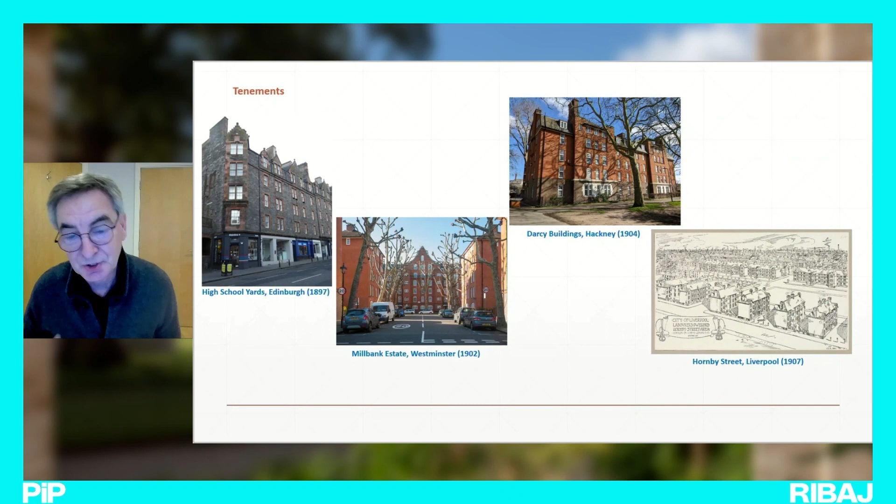So tenements were a means, it was felt, of providing dense habitation within the inner city, close to work, etc. But the ideal was certainly the cottage and the garden suburb, taking its cue, as you'll all know, from Ebenezer Howard and the Garden City movement, but expressed on a sort of smaller municipal scale in schemes across the country.

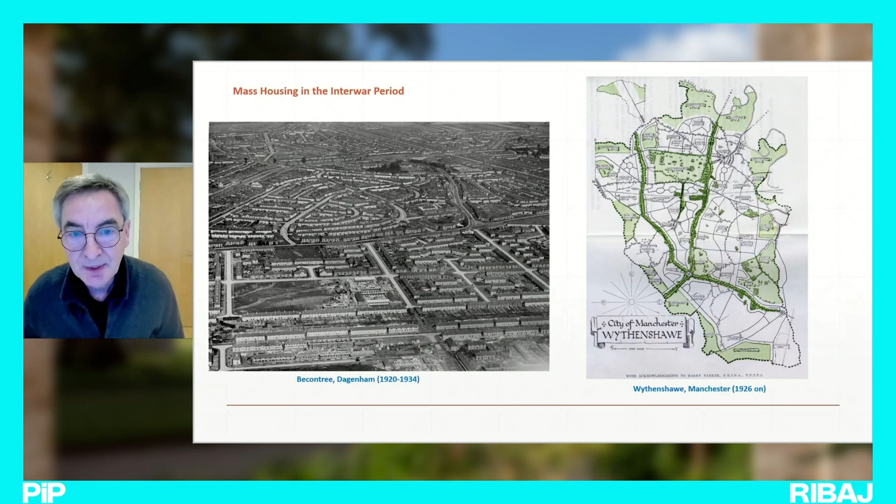Becontree, of course, was criticised for that scale and enormity, alleged uniformity. City of Manchester Wythenshawe, Barry Parker, the plan there you can see, was I guess a higher grade social housing estate, built with parkways and plentiful green spaces, neighbourhood units and so on. So it represented really almost a township in terms of its quality and overall design.

So architects and architectural gurus always look to the British history of council housing and tend to be somewhat disappointed, certainly in the interwar period, by its rather small-c conservative style and appearance. So there were some examples of modernism. Sometimes the form, the exterior, betrayed the reality, which is still this 5-storey walk-up balcony access.

But certainly on the left-hand side, the Oaklands estate, London County Council, as was the White City estate there - you know, this nod to the ocean liners of the day in this modern styling. White City estate was actually a move away, the new flat. You can see, probably not in sufficient detail, but the new flat staircase access in this case, with a sliding partition between the kitchen and dining room. And so a real attempt to modernise tenement living and make it more attractive.

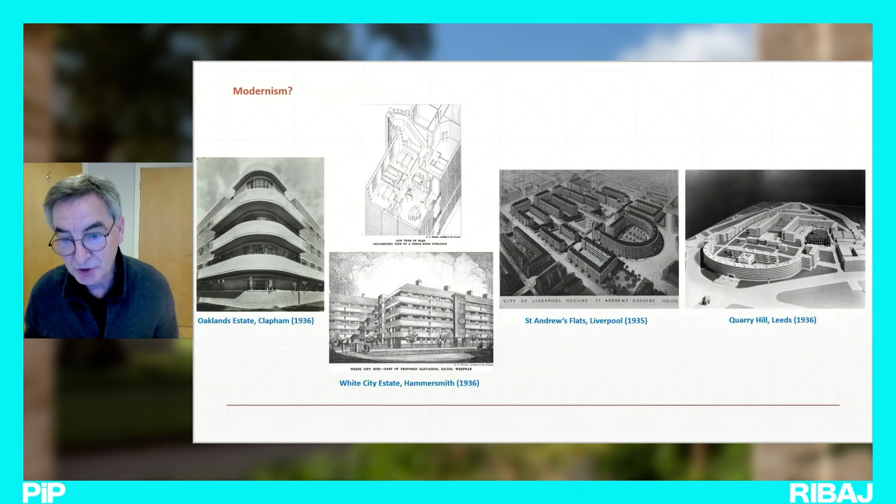St Andrews flats in Liverpool, Lancelot Keay, and Quarry Hill flats in Leeds were obviously, as you can see, an attempt to build at scale, but an attempt to build really a community - so not just those flats as illustrated, but a living community in terms of facilities, a wide range of facilities. Quarry Hill was also very innovative in its use of prefabrication, not unfortunately successfully so. It was eventually demolished in the 1970s.

So this takes us up to the Second World War. And of course, that same drive, that same post-war aspiration, and indeed necessity, given popular pressure and politics, to build well and to build at scale, to house the British people far better than they had known previously. And you know, what emerges in '45 is actually, in some respects, very much a critique of what had developed before the Second World War.

Becontree, for example, was criticised for its lack of community. Other similar estates were seen as rather soulless and uniform. So there were several attempts to actually improve the nature and form of council housing, the council estate. Most notably, and this was Patrick Abercrombie's big idea, really the foremost planner of the era, the neighbourhood unit.

And the exemplar of that, the avatar, was the Lansbury neighbourhood, built for the 1951 Festival of Britain, and designed, as you can see on that left-hand image, to be a complete neighbourhood - a self-sufficient neighbourhood centred on the catchment area of an elementary school, schools, churches, shops, pubs, etc. And it was believed that this would actually foster community and in some respects recreate what was allegedly being lost to the demolition of the slum terraces.

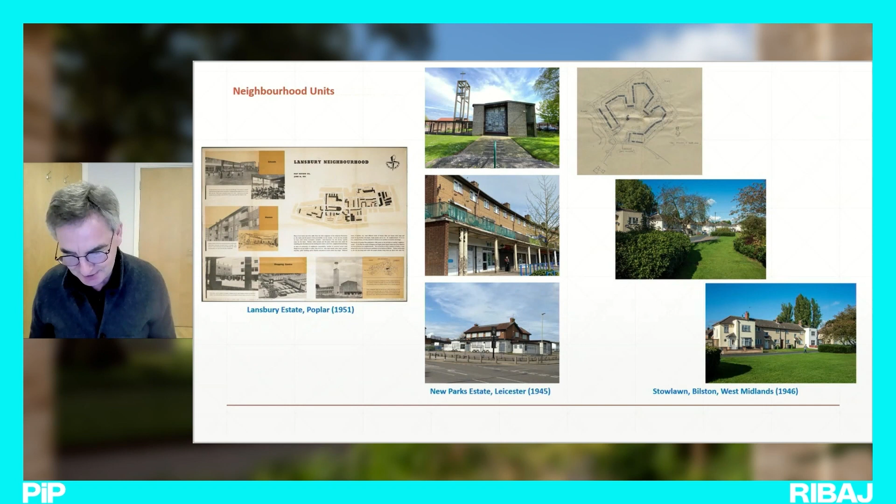So looking again, the other big idea to both improve the appearance of council housing and its offer, as it were, was the notion of mixed development. Not a stunningly innovative or surprising idea, but the reality is that in the interwar period, nearly all council housing had been family housing, 2-3 bedroom family homes. And by 1945 and on, there was a realization that a wider range of the population - elderly people, elderly couples, single people and childless couples - also needed council homes.

Mixed development was an attempt to provide a range of housing to people in different stages of life, but it was also envisaged and embraced by architects as a means of providing a far more interesting and greater variety of housing forms and shapes.

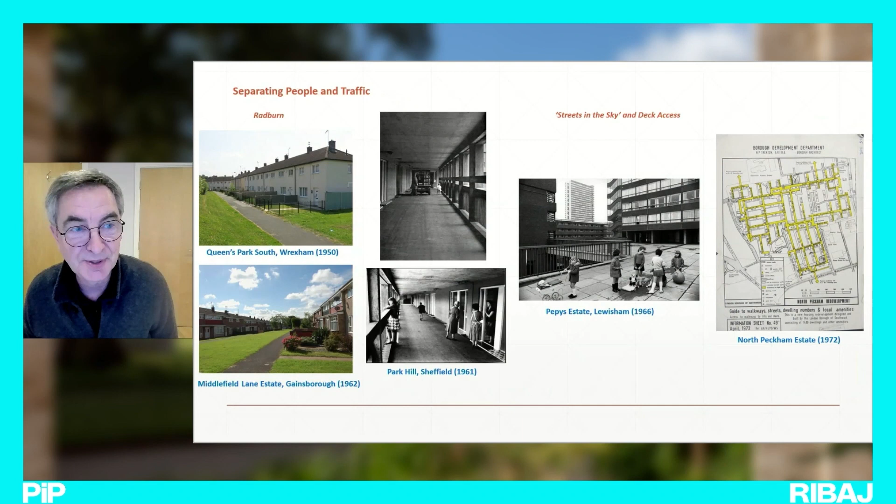Multi-story, of course, becomes a necessity - both to avoid the sort of sprawl into rural areas, and to provide density, allegedly density, within the inner city.

But again, the ambition and drive to build at scale sees that corrupted in some sense. System building poorly executed in a British context is one issue, and then just the drive to build high - although actually only in 1968 were 25% of new approvals high-rise over 6 stories. In fact, between '45 and '79, 70% of council housing was 2-story.

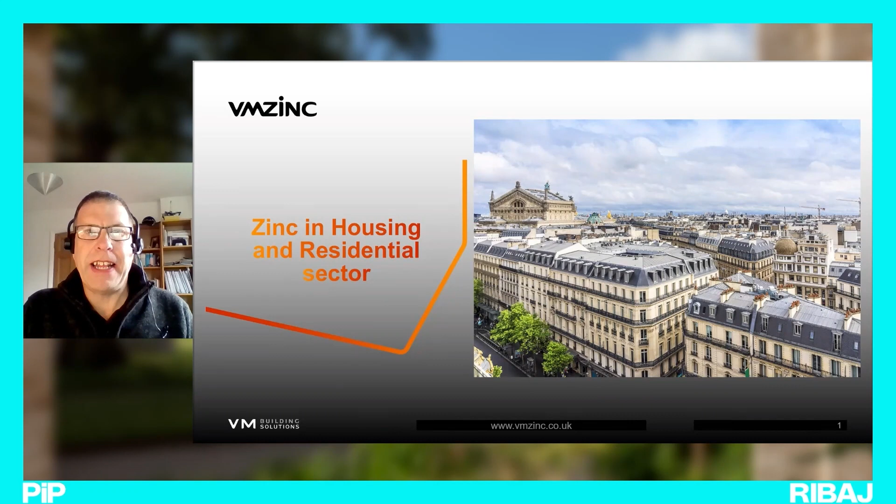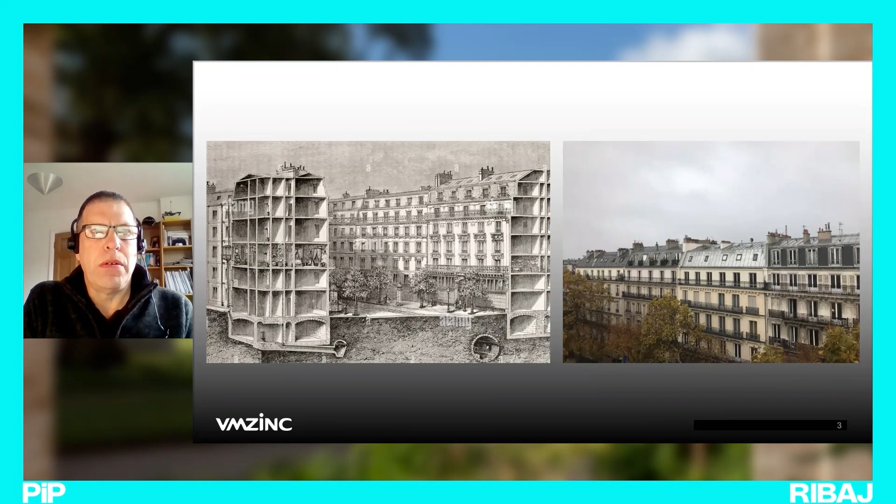Baron Haussmann built, or planned, these grand boulevards, which are pretty much still completely intact today. As mentioned previously, there was a bit of mixed use in a lot of these buildings. The bottom two floors, ground and first, were business areas, the second, third and fourth floors were the noble quarters, and the top floors were the servants' quarters. Obviously there aren't too many buildings with servants' quarters left, but the top floors are often residential and clad in zinc.

There's sometimes a combination of zinc and slate, or just zinc, but 95% of these buildings have zinc on them. Something I get asked about quite often is the acoustics of zinc, especially if it's directly above a bedroom - and nearly all these roofs are above bedrooms. Zinc is relatively soft, not as soft as lead, but much softer than steel and aluminium. Because it's fully supported, the amount of sound from impact noise like rain or hail is actually very, very small indeed, so generally not really a problem.

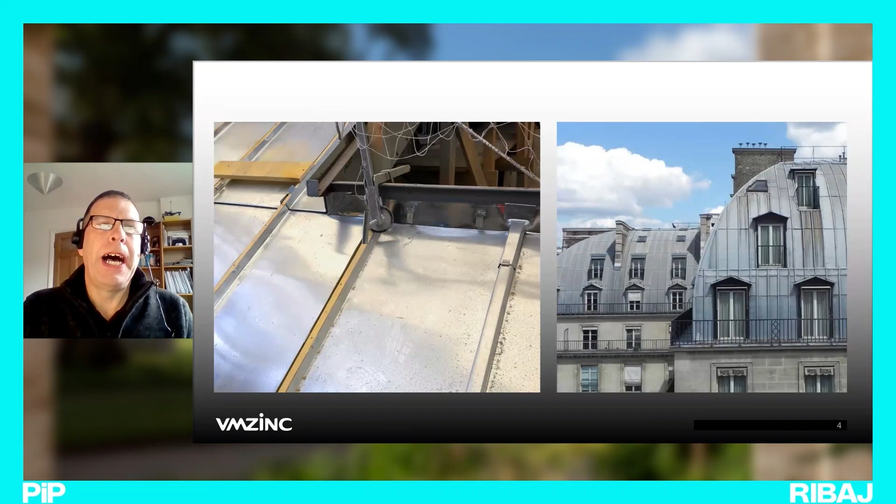Just to show you close up - I've had conversations recently with people thinking zinc is just standing seam. Traditionally it's batten cap, not dissimilar to a lead roll. On the left you can see a U panel with a piece of timber and then a cap over the top - that's the traditional way of doing zinc roofing.

Sometimes it's used to replace lead roofs. Zinc and lead actually have a lot of similar characteristics, but one of the big differences is density and weight. A zinc roof weighs about 7 kilos per square meter, whereas a lead roof is close to 25 or more - that's unfortunately one reason why lead gets stolen, since you don't need to steal much to make it worthwhile. But stealing zinc, you'd have to steal an awful lot, so in reality that never actually happens.

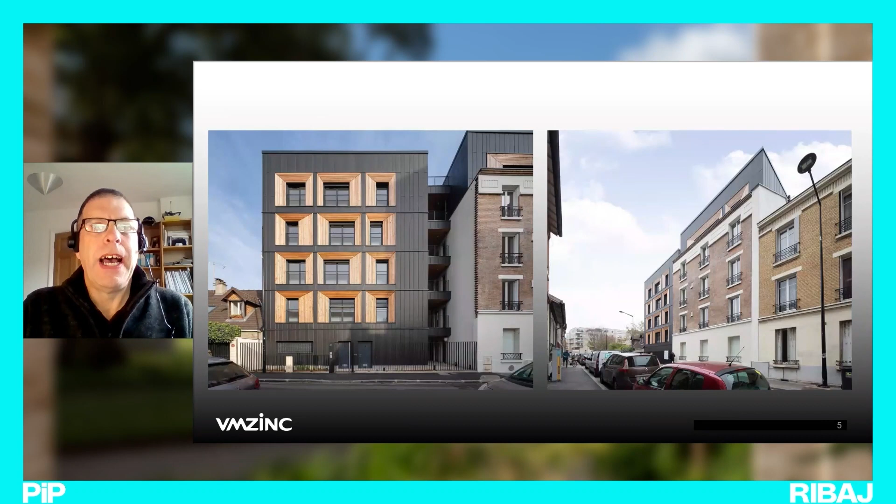As the previous speaker John mentioned, especially around Paris or other French cities, there have been housing estates that haven't been the most successful socially. This photo is in Aubervilliers, a fairly working-class northern suburb of Paris - a 1920s building that's been redeveloped, extended upwards and sideways, with about 15 affordable units added, clad in a combination of anthracite, which is dark zinc, and timber by Pietri Architects. There's been a desire to reduce building heights, going from very tall 20-25+ storey buildings to lower rise, still quite high density but lower rise.

Moving to the UK, this is a development in Manchester called Lampwick Quay by Callison RTKL Architects, finished about a year ago. Larger scale this time, with 213 units.

And it uses, from the zinc perspective, a combination of systems and finishes. Zinc is generally grey, but there was a desire by the architects to highlight some areas, and a gold zinc was used. One advantage of zinc over other materials is it's very malleable and flexible, so you can clad tricky flashings and details with zinc when other stiffer materials are trickier. Here you see a combination of the pre-weathered quartz zinc and the coloured gold zinc using standing seam and rain screen systems.

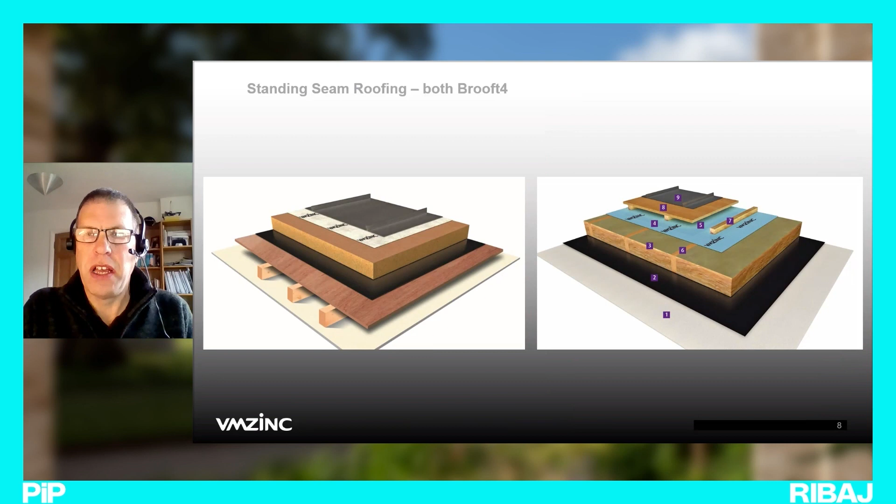As you saw on the previous slide, we talked about timber. For walls, for example, the project in Manchester Lampwick Quay required non-combustible substrates, residential building over 18 meters. It's quite straightforward to replace the plywood or timber substrate with a galvanized steel deck. The zinc itself is A1 - it can become A2 with some coatings, but that's still quite acceptable, as it's non-combustible or of limited combustibility. So it's fairly straightforward to create an A1 or A2 wall build-up with zinc.

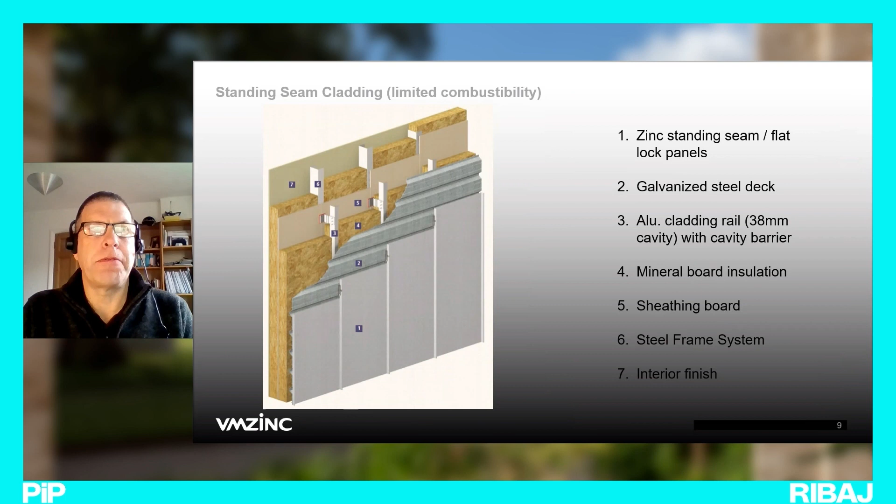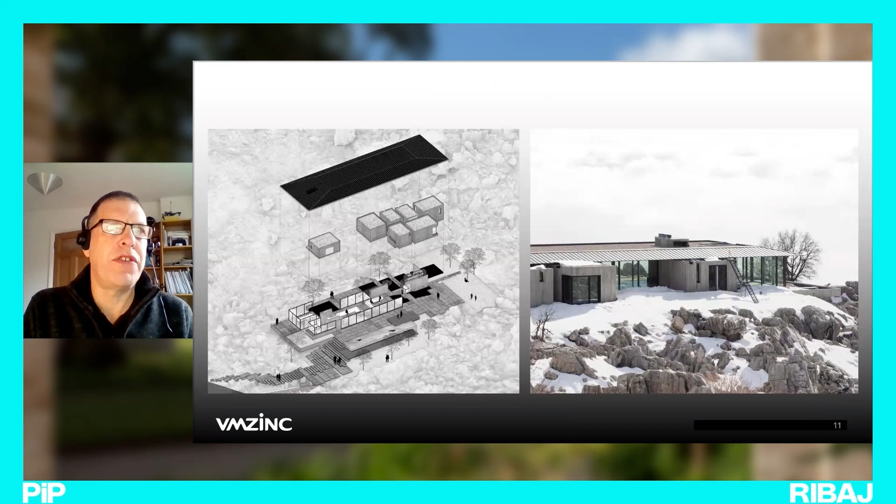Moving out of Europe, this is I feel quite a spectacular project - a building or house in Mount Lebanon called On the Rocks. I think you can probably see why. It's at 1,600 meters altitude, and the whole design really fits well with the environment - the anthracite roof, the concrete, and the glazing. On this slide on the left, you can see, it's obviously a blown up image, but the idea is that the zinc roof sort of floats above the building quite effectively. This is a project by Karim Nader Design. It's nice to see quite an interesting building in such an unfortunately war-torn part of the world.

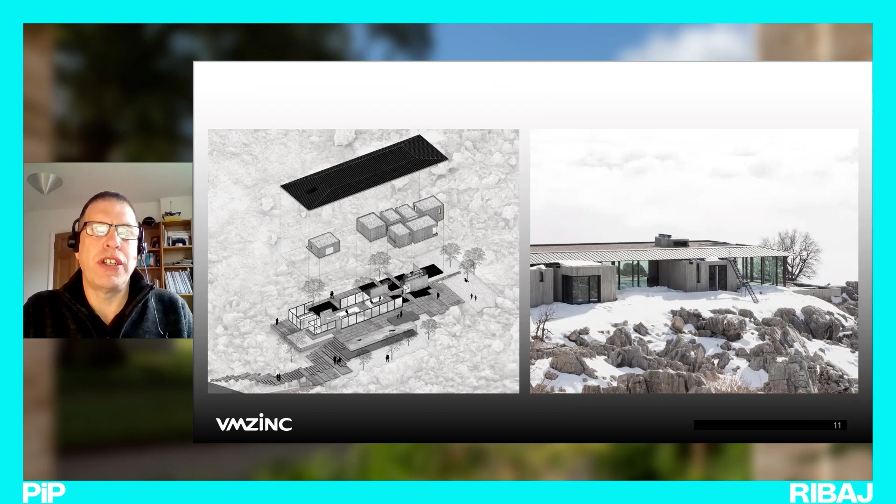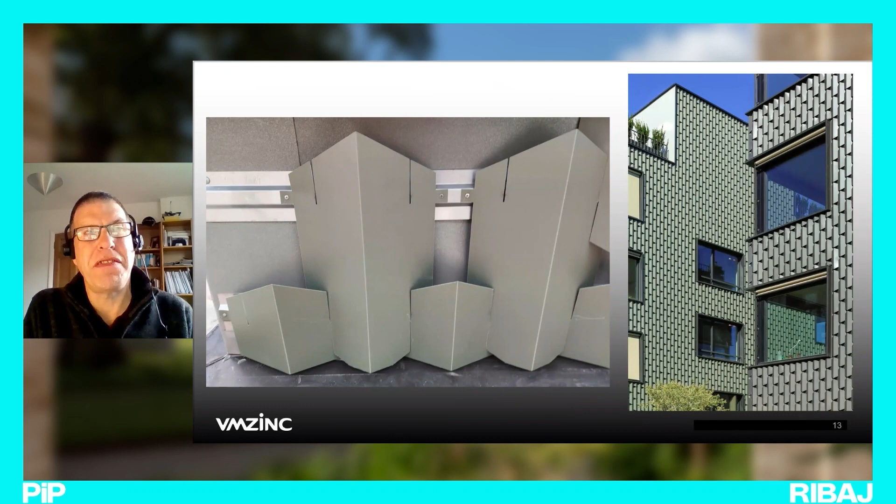Back into Europe, this is a residential building in Zurich, Switzerland, in an area with a very eclectic group of buildings, so this one fitted in quite well. It uses Pigmento Green and Pigmento Grey, which is zinc with a mineral pigment added, giving a slight greenness, as you can see on the facade of this building - it's a bit like looking at zinc through tinted glasses. Here you can see how the panels fit together - it's actually very simple rain screen panels, installed bottom to top. This design was by Menzi Bergler Kaufmann Architects, and they used 14,000 of these little shingle pieces to create this textured facade.

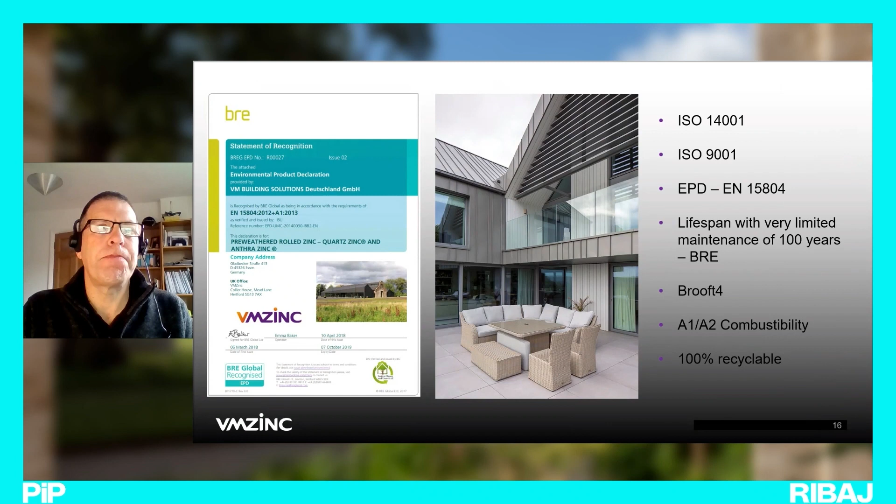If you do need any assistance in design, we'd be happy to look at that. One important thing is installation. Zinc is a great material, but it does require good installation, certainly if you want it to last any amount of time and still look good.

We have a list of recognised installers, and we have a program of VMZinc at Work partners that can offer a 50-year material warranty. So that is something that's very important. We would always recommend that a recognised installer fits zinc. Zinc is not something that can be installed by a general builder.

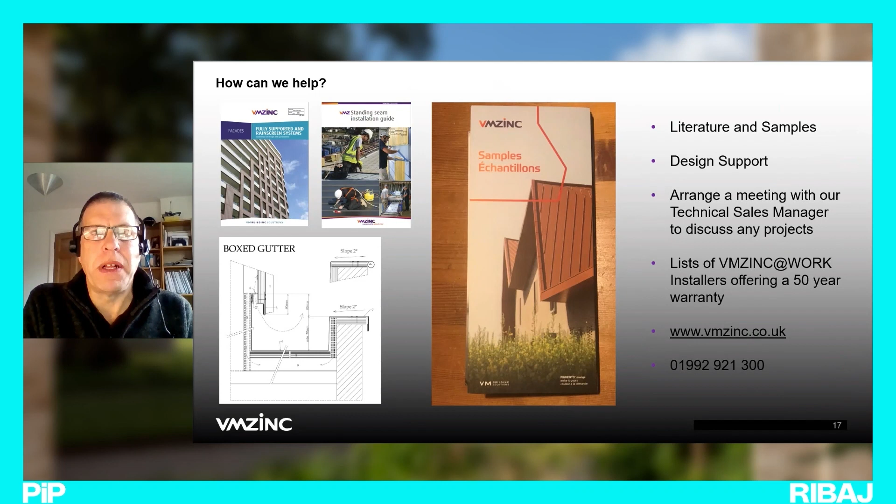You kind of skirted from 170 years ago all the way to the modern day, Jonathan. I cheated a little bit, yes.

Thank you very much indeed for that. It was nice to see those examples. I particularly liked seeing that Lebanese project, really beautifully done. Just the very fact that you could look at that building immediately and realize that the roof is doing that expressly, that purpose. Everything else moves underneath it and the roof just floats above. Really beautiful project. I've not seen that one.

I suppose my technical question, because you did go into some technical aspects there which were interesting - just as a general rule, could you tell me what affects the fire rating of the zinc sheet? It seems to be that the general thing is if you give it a colour coating, that may affect it. Is that correct, or is it that simple? It pretty much is that simple.

Zinc itself is a metal and is non-combustible, and all this is solid pure zinc. A lot of those products that you saw are natural zinc, or quartz zinc, or anthra zinc, and that is just zinc which has nothing added. Some of them are chemically treated, but then nothing's added.

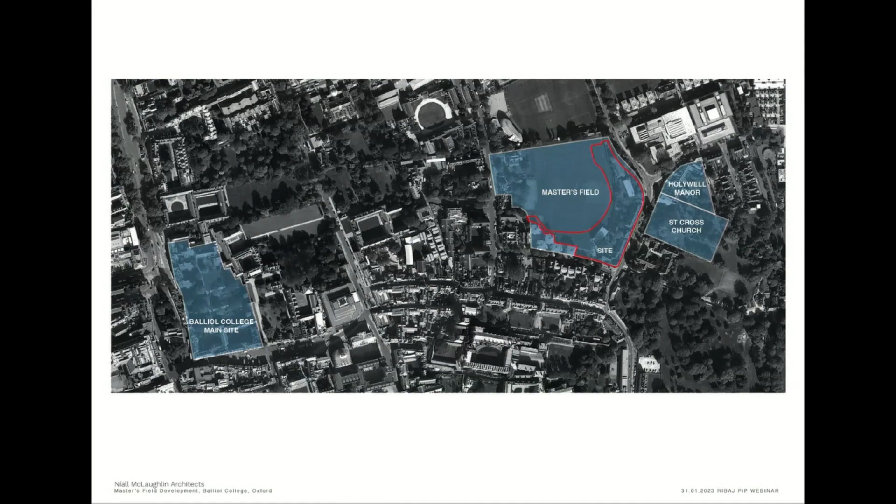The site is interesting because it's proximate to the civic core of Oxford, and also to the larger University Parks developments, which occupy the north, and a lot of the parkland setting to the east of the site. As an office, we're really fortunate to have worked in Oxford for a number of years, and the Master's Field Development joins a series of these projects.

One of the earliest to be completed was some student residences for Somerville College as part of the Radcliffe Observatory Master Plan. We also delivered the Sultan Nazrin Shah Centre for Worcester College, another project that occupies the edge of a cricket pitch, similar to the Master's Field Development, which is just here at the bottom of the sheet.

We've got a few projects currently at tender and planning stage in North Oxford, one for University College, identified by the 7. That should be starting on site in the next few months. And we've just submitted for planning a hybrid scheme for a college and Oxford University along Winchester Road, which is here where my cursor is.

This map is useful because it highlights the site's geographical position, hugging this edge of the civic core, and then the expansive landscape to the east. To the north you can see the larger scale of institutional buildings, and to the east, those of you familiar with Oxford will recognise Arne Jacobsen's St Catherine's College building here.

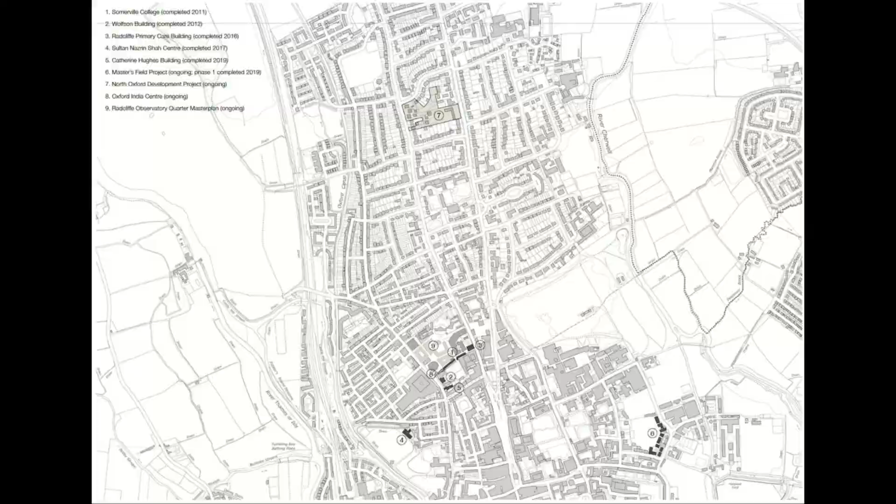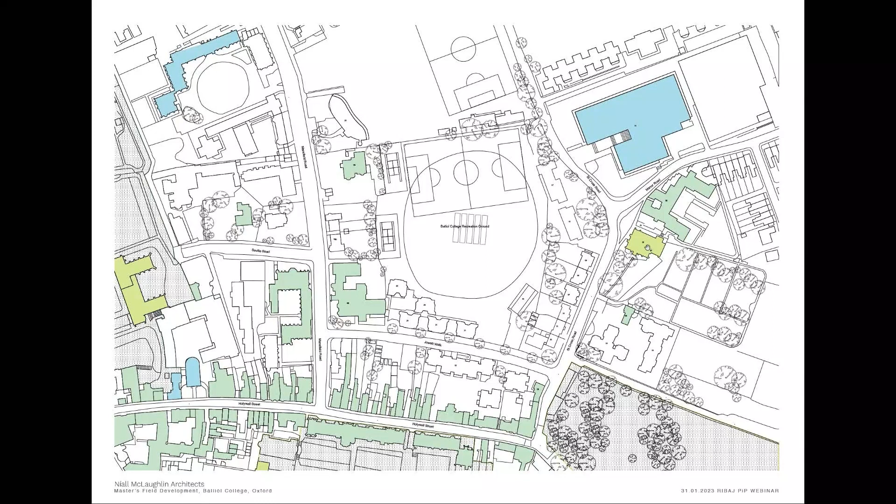When we were introduced to the site, we were mindful of its historic setting. There's a series of listed buildings proximate to the site itself, and then Holywell Street, one of the oldest streets in Oxford. We've got the Grade 2 star listed Law Library by Sir Leslie Martin in the northeast corner of the site, Holywell Manor, which is Grade 2 listed and houses the graduate facilities, and then St Cross Church, a Grade 1 listed building currently hosting the college's archive centre.

The project was always going to need to reconcile a series of very different and disparate architectural conditions around the edge of the site. I've introduced you to the buildings on the right already - we've got the stone, the buff coloured stonework of the church, and a similar buff brickwork that was used by Leslie Martin in the Law Library.

And then there's a scheme developed in the late 90s, early 2000s by MacCormac Jamieson Prichard, which has a very strong yellow brick, and that sits in close proximity to the site along the south.

Another interesting condition of the project when we were introduced to it from the college was a series of unrealised master plans that had been proposed for the site over the years. Starting at the north was the master plan by Leslie Martin for multiple buildings at the northern part of the site.

What was interesting here is that the buildings to the north cascade along the arc of the road towards the church, stepping back and forth with the library. There was obviously some kind of dialogue that the architect was trying to set up there with the library development and then the future propositions to the north.

Similar to the south, the scheme by MJP was envisaged as a much larger development. They continued the rhythm of buildings and promontories that would follow the arc of the cricket pitch.

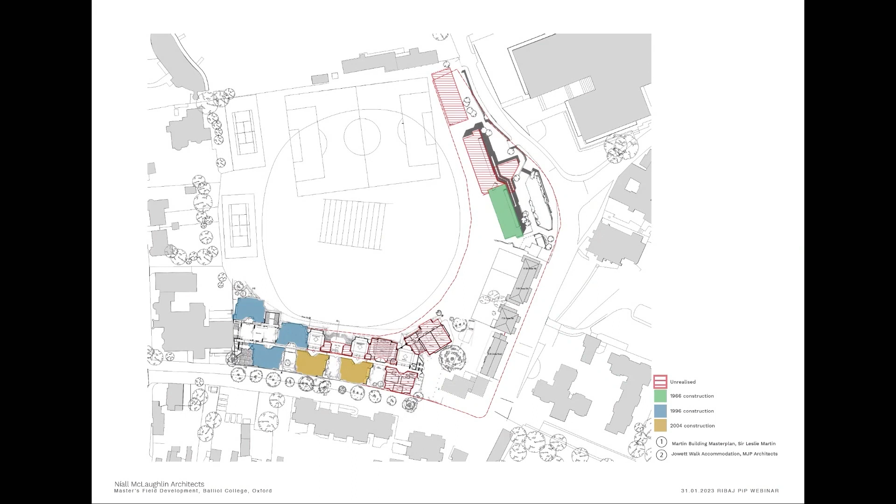So when we were asked to develop a series of student rooms for the college, we were mindful of the layers of history on the site and how we could make nods and take cues from those. Particularly the buildings at the north - they're larger in footprint, and we slip and slide them backwards and forwards towards St Cross Road in dialogue with the library.

Where the library pushes into the site, we recede a building. Where the library building recedes, we nudge the buildings forwards, and we mimic this cascading of building gables towards the corner of Manor Road.

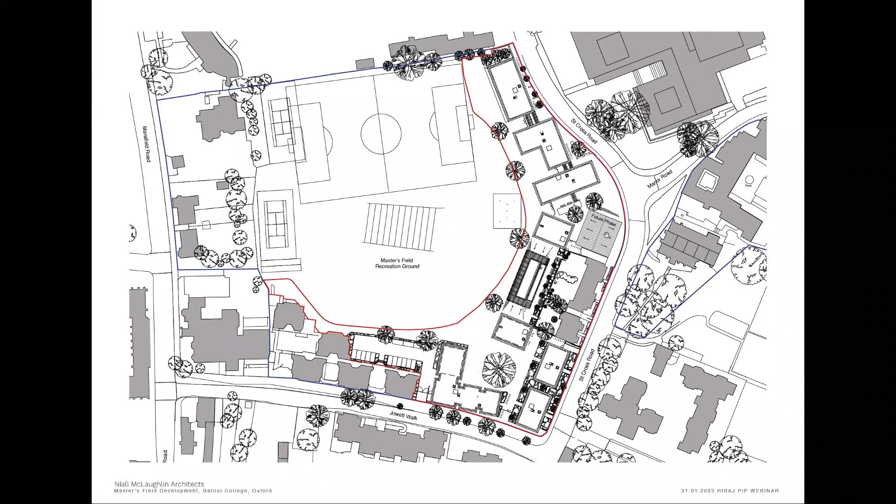We were interested in looking at the gaps between buildings. The scheme provides 225 study bedrooms, a 3-bedroom professorial flat occupying the top floor of this building to the south, a new sports pavilion anchoring the centre of the plan, and planning permission for an assembly building at this corner, providing facilities for graduates as part of an extension of Holywell Manor.

This is very much a project about buildings that form the edges of streets, and is sensitive to the material scale of the historic context. Most of the buildings are 3 stories. Where they're in proximity to residential buildings, we step the buildings back from the street and introduce garden frontages to act as defensible space for the residences, mimicking the garden-lined frontage south of St. Cross Road.

To the north, where buildings sit closer to the street edge, we elevate the bedrooms. This acts as an acoustic buffer from street noise, and we've also used enhanced acoustic glazing and trickle ventilation in the windows. Here you can see this series of cascading gables as you move southwards along St. Cross Road, which also frames the gable of the church.

Another key aspect of the scheme was looking at the scale and massing of the buildings and how we could introduce gaps between them. Historically, college developments are fairly introverted, often set behind high walls, offering limited public interaction with this private inner world beyond.

With this scheme, we wanted to flip that narrative and maximise the site's proximity to the parkland settings to the east, and also pay homage to the rhythm of buildings and gaps between buildings that the MJP scheme had set up in the late 90s.

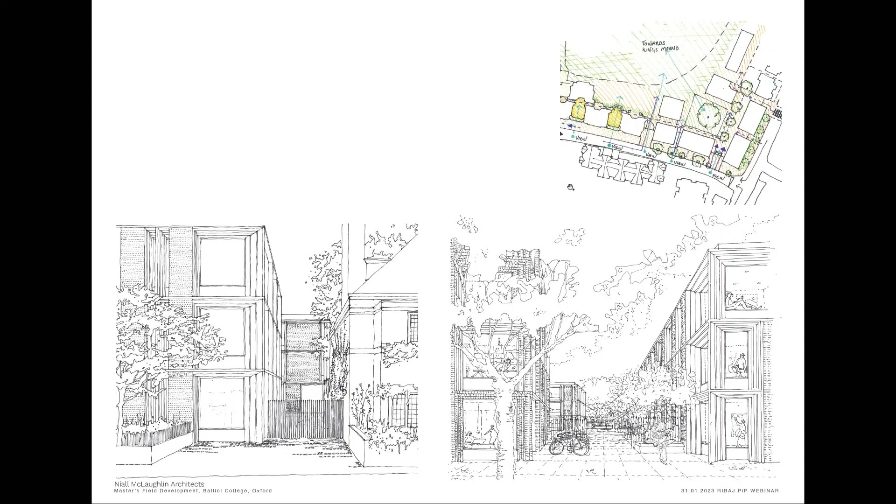Each of the buildings' footprints are relatively small, which allows us to break up the massing with a series of gaps between buildings that offer long views through the site, both to the gardens we've created and towards the cricket pitch. You'll have seen this image at the start of the presentation, one of those gaps looking across the new undergraduate southern quadrangle, framing a significant veteran beech tree and a view towards the cricket pitch beyond.

At each of the gaps between the buildings, we also looked to plant trees around the arc of the cricket pitch, which is also a nod to the village green for Sunday cricket playing.

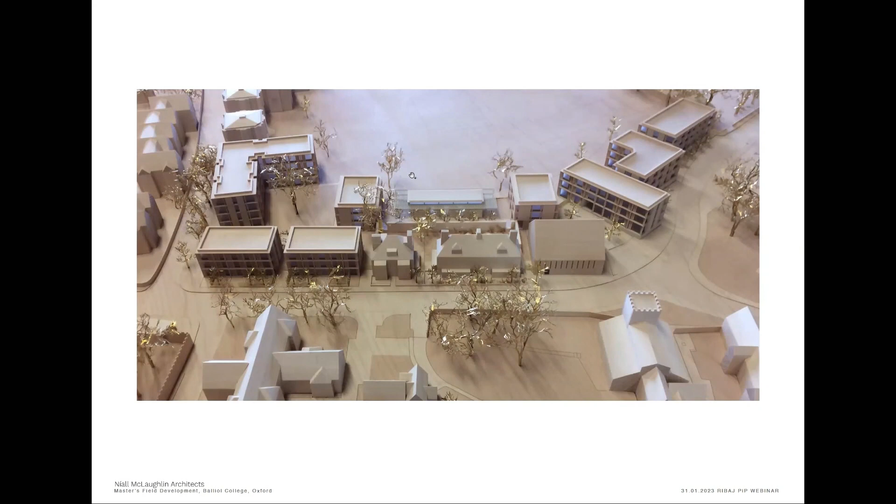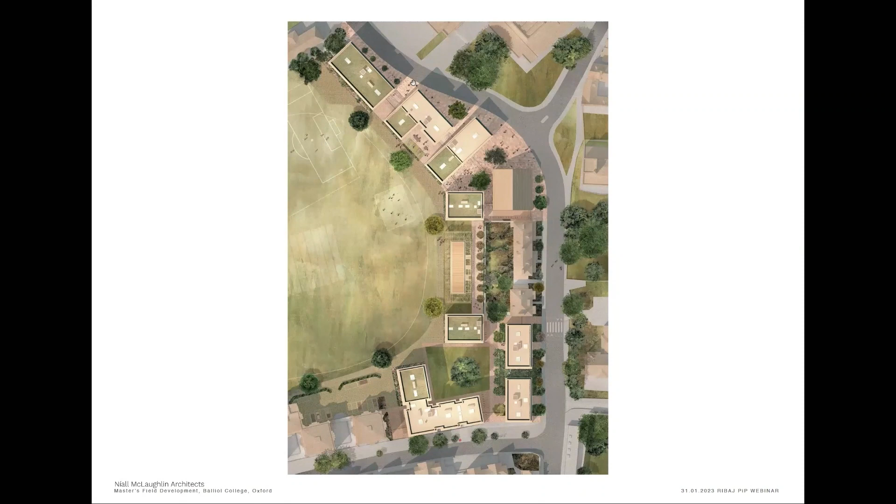Collectively, these buildings are grouped as clusters around the new landscapes we've created. Buildings are close to the street edge to the south, recede along the eastern edge with those gardens we saw earlier, and then step backwards and forwards in dialogue with the larger scale of buildings towards the north.

In terms of the plan and the brief, the college asked us to consider an architecture that could reduce social isolation. When we thought about the life of students, we imagined this social gathering and interaction at the heart of student daily life.

We placed the idea of students around a dining table and looked to cluster rooms around this social gathering space. We then took that notion of spatial arrangement within each cluster and arranged buildings radially around communal gathering spaces, in this instance an external quadrangle.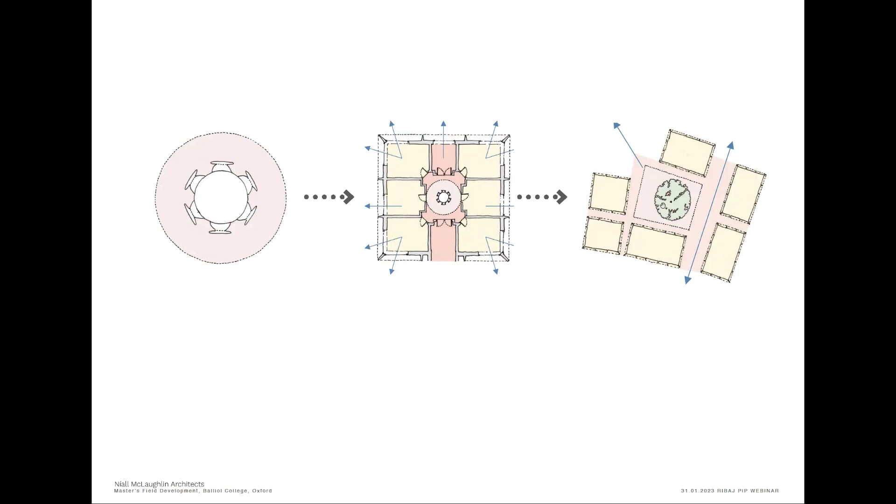At the centre of each of the clusters, we widened the corridors. This allowed us to create dining and social spaces. It also allows us to recess the entrances into each private study bedroom within a niche, offering a private threshold between the corridor space and the bedroom itself.

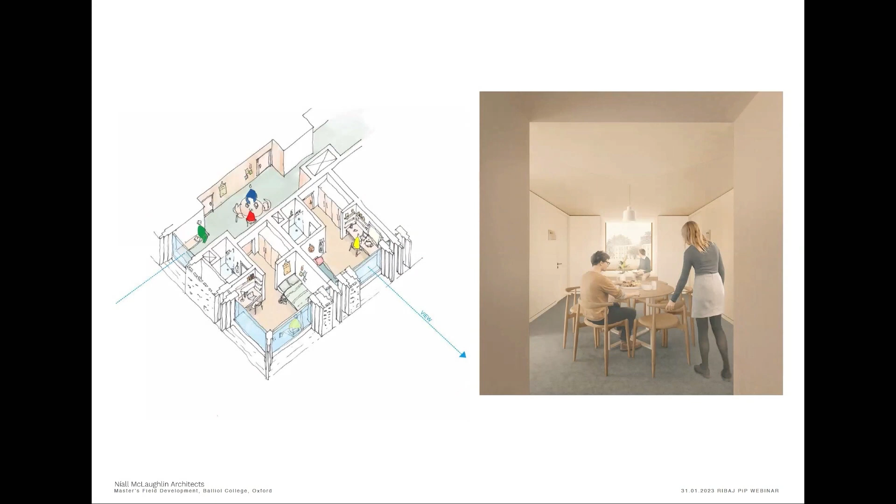Each of these clusters comprises a glazed link at the end of the corridors, offering views out across the landscape and flooding these shared spaces with light. We painted each cluster in calming colours and elevated the ceilings to announce this central social space.

We then scaled that up as a spatial arrangement across a series of buildings to create a necklace of clusters, all linked through the glazed gable ends, building to building. It also allowed us to keep the building footprints fairly modest and maximise the quantity of dual aspect bedrooms at the corners.

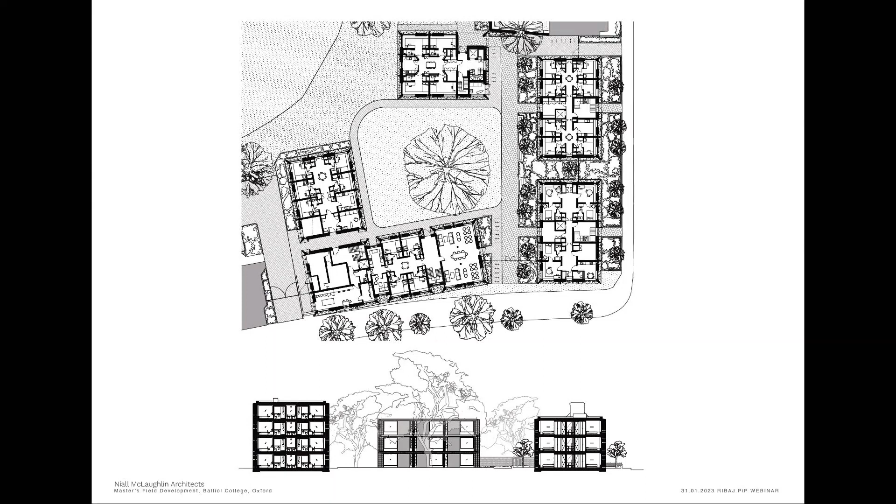Each of the rooms are fairly simple in terms of their fit out. They're all individual study bedrooms with an ensuite bathroom pod typically, and a range of furniture that can support both the sleeping function of the room and study. Each bedroom also comprises a window bench for resting.

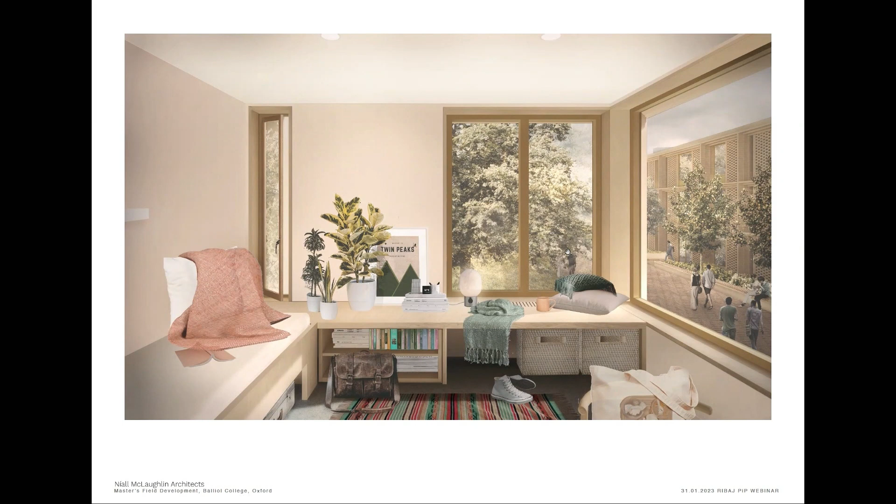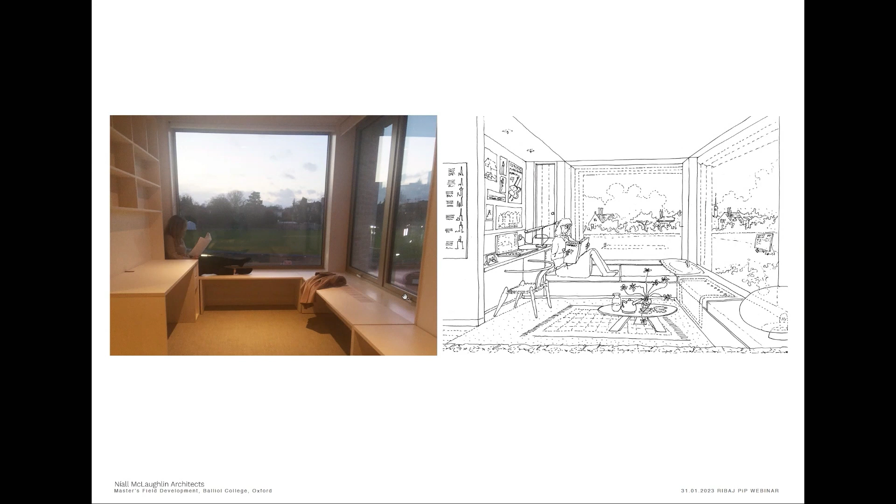Externally, each of the study rooms is represented within a brick face precast bay. The bedroom itself is recessed back within the depth of the piers, and then there's also a woven motif panel that sits between the two windows. All windows are openable on these elevations for natural ventilation into the bedrooms. This woven motif acts as a dividing panel between the bed and the study area.

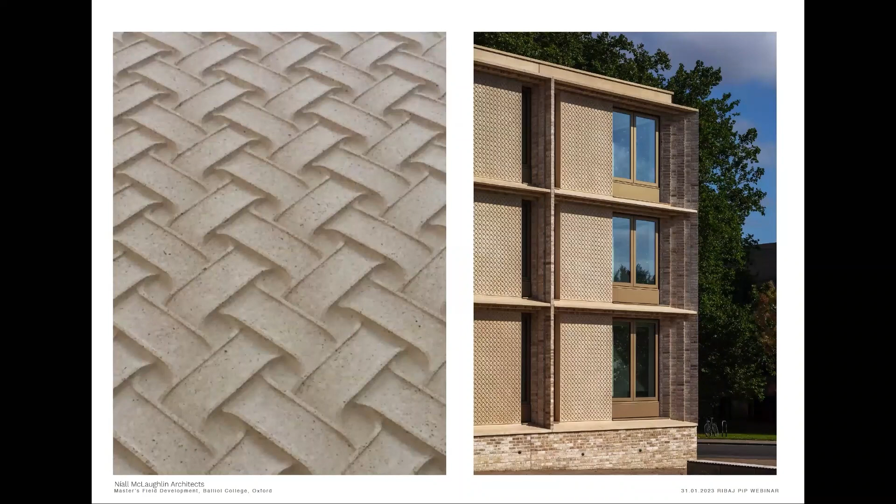The panels themselves support the gravity loads and the downward movement of those across the spandrels and the sills as well. But because we've recessed those back from the piers, their tectonic functionality becomes deliberately ambiguous. Locally, the motif takes its cues from the frieze of the Ashmolean, also in Oxford, designed by Cockerell.

We work extensively with mock-ups generally, and on this project we worked in close collaboration with a series of specialists, Thorpe Precast being one of those, who were responsible for the brick face precast elements and the woven motif on this project. Here was one of the facade bays that they'd mocked up in their factory that we then relocated to site, and we used that to test interfaces, junctions, and all the exciting stuff like movement joints and so on.

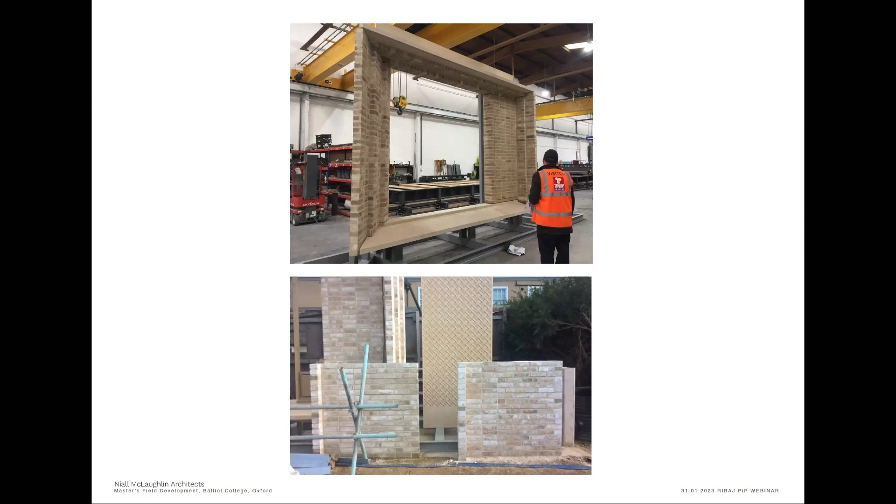We also expedited one of the installs of the facade bays on site in situ, which gave the college an opportunity to get a sense of scale of each of these study bedrooms. In the room beyond, the internal fit out was also expedited so the college could understand the general spatial intentions of the room and the fit out.

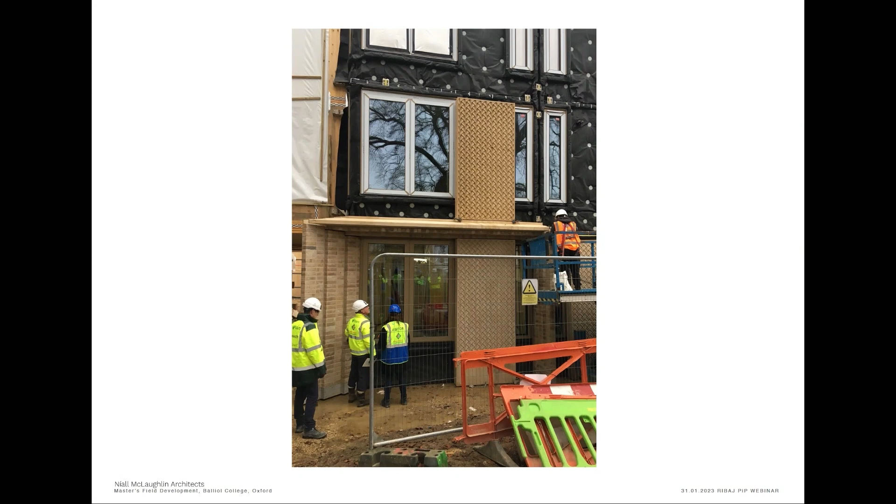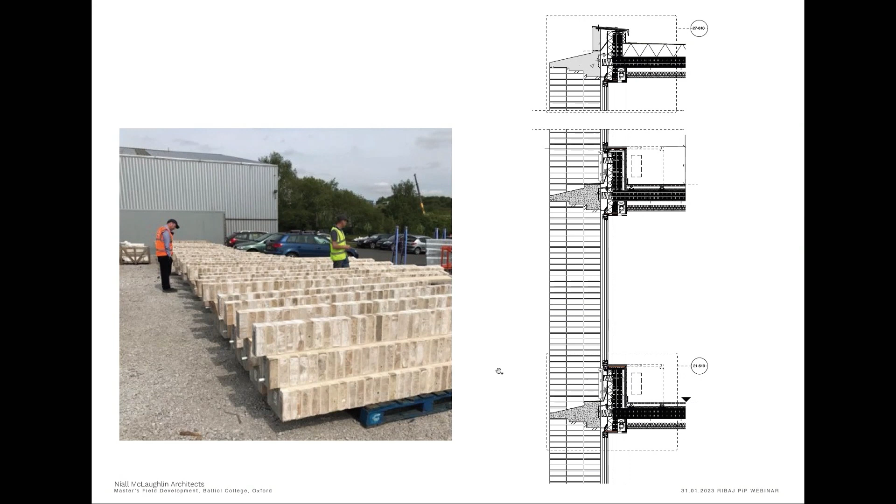The piers themselves are 3 bricks deep, and we've recessed the glazing line back within the depth of these. This offers the user privacy from the passing public realm and footfall across the site. Yet when you read these piers on the oblique, they taper towards a thinness of 1 brick thick at the nose, and you'd have seen in the photograph of the room earlier, a tightly configured corner in the interior.

We took this series of components, both the brick piers, the corbelled brick piers, and the precast motif, and replicated that around the site, creating a series of rooms that are stacked and clustered. We enjoy the use of the piers when read on the oblique - it gives a more solid appearance to the envelope and the elevations that isn't otherwise noticed when you look at them straight on.

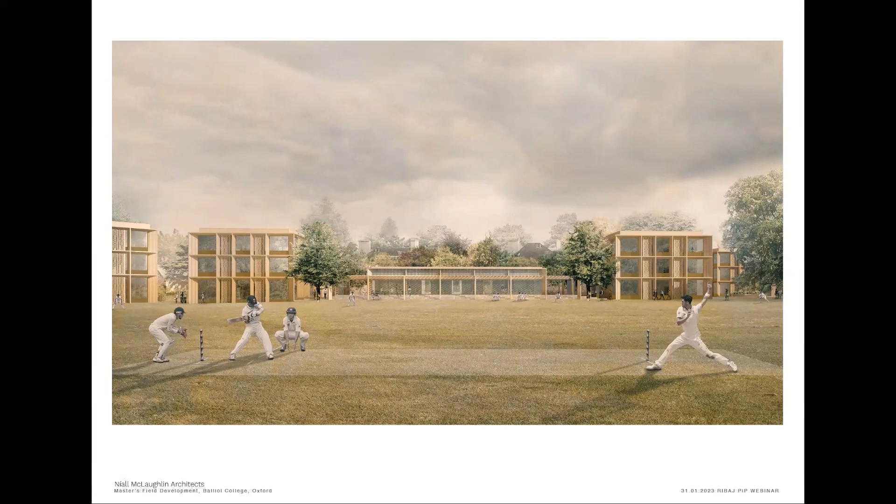I'll wrap up this presentation with an introduction to the sports pavilion, which sits at the centre of the site. This is a single-storey cricket pavilion for spectating of the sports on the cricket pitch, and also houses a squash court and changing facilities for the matches.

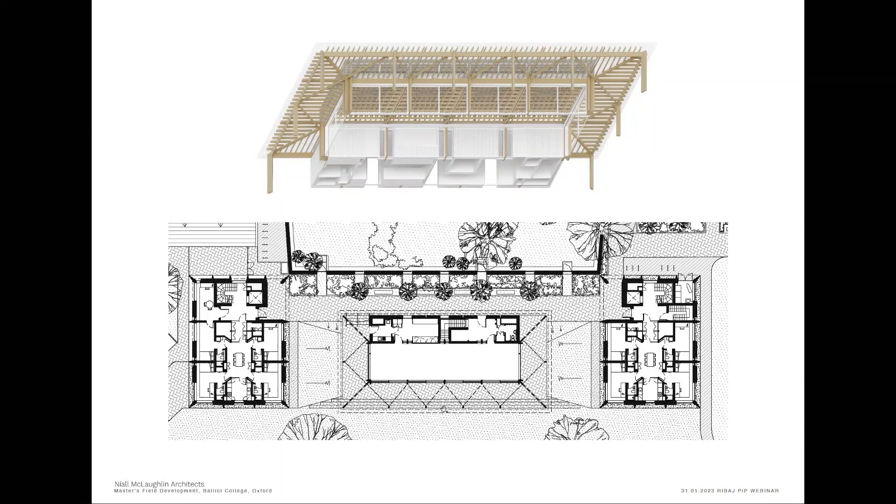It's a simple building in footprint. It comprises 4 timber-clad cassettes to the rear of the plan, and they sit under an intricate timber lattice roof, both internally, and then that extends around the perimeter of the plan to form a covered canopy for external cricket viewing. We created glazed links within, between each of those timber cassettes, that link up to claire-voies within the garden walls of the residences to the rear, offering long views through the building and out towards the cricket pitch.

The envelope is predominantly glazed. We use generous sliding glazed windows - Schuco systems - that open out onto this covered terrace for viewing the sport both from inside and outside. The main hall itself features a series of stacked sweet chestnut timber lattices that was developed by engineers Smith and Wallwork and realised with Inwood and Xylotech as the specialist fabricators.

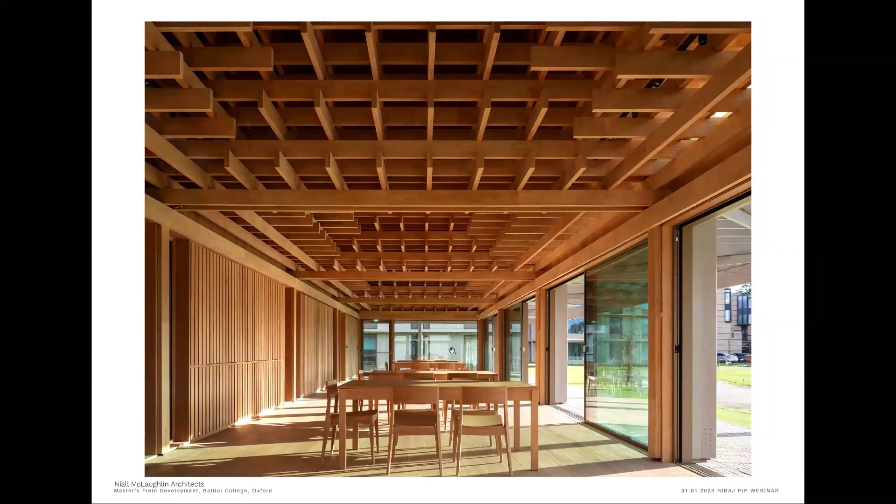Within the lattice itself, we house a series of integrated lighting units that offer the client an opportunity to customise the lighting settings to host a range of functions. I'll land here on the image of the main hall, looking across this repeating stacked timber lattice.

That's okay. Thank you very much indeed, Holly. That was a whistle-stop tour of Masters Field. It was fantastic, thank you.

I was really intrigued by the macro and micro approaches you have, and the fact that I loved the stepping of the piers, in the same way as it seems to reflect the actual stepping of the whole building in plan. That's a lovely reflection of one with the other in detail and on the bigger scale of the project itself.

That was something we were really interested in - how can you create buildings and a building envelope that responds to the needs of the users within the space, offering them privacy from quite a busy public realm, but also considering the buildings as part of a wider placement within a historic context. How can each of the buildings around the site respond to their adjacent neighbours and buildings, offering something both to the public realm and to the users internally.

We like as an office a deep facade generally. Steps, chamfers, reveals - something that we enjoy and explore on a range of our projects.

It's true, because there's always been the town and gown thing, and I suppose now with modern architecture it's a matter of - traditionally those colleges have always looked inwards. So the idea that within the modern day these buildings also look out as well as looking in - there's a slight dichotomy there, because you want to respect the tradition, but at the same time you're trying to contribute to the urban realm rather than just turning your back on it.

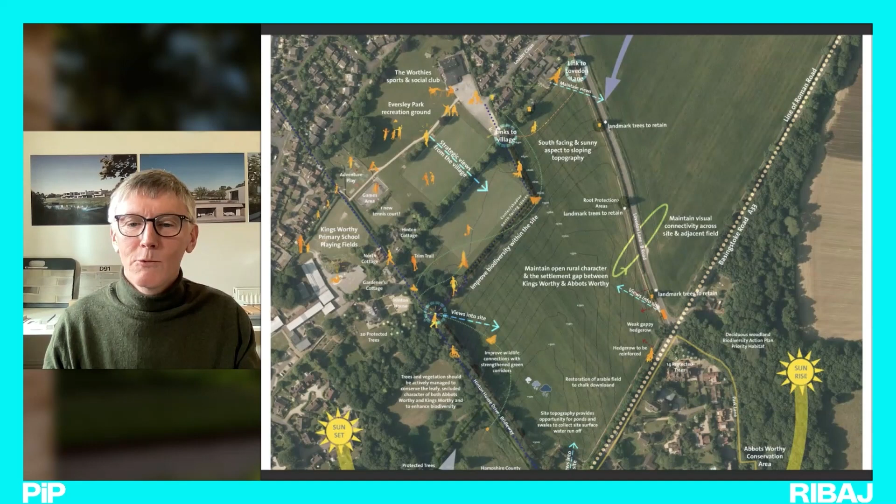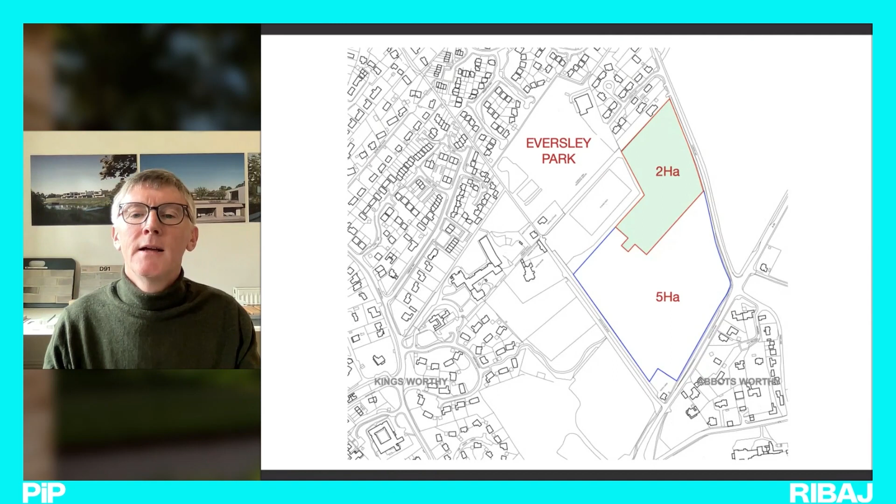As I mentioned, the 2 hectares in this rather odd shape was the site that Winchester agreed should be allocated for built development. In reality, the master planning of it was extremely straightforward. There was only one location on Lovedon Lane where we could take an access because of visibility, and that happily sat in the middle of the longer part of the site. So we were able to put a lane through the middle that then continues and connects into paths and tracks leading into the village.

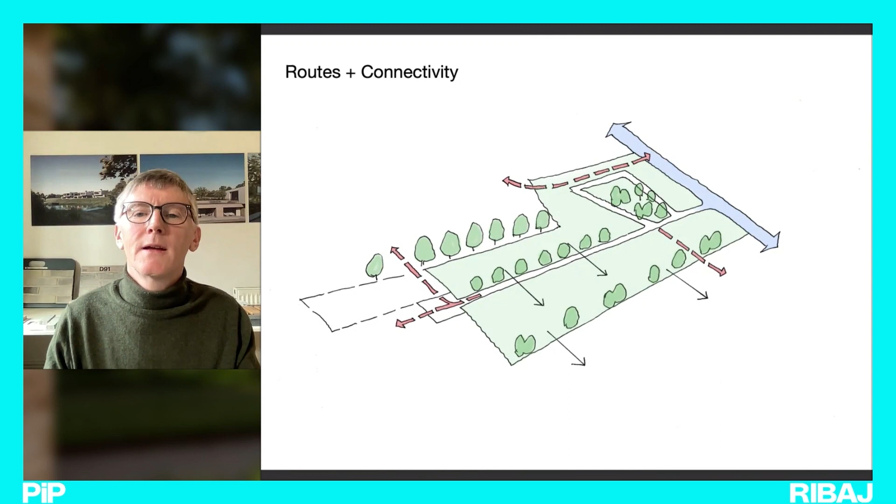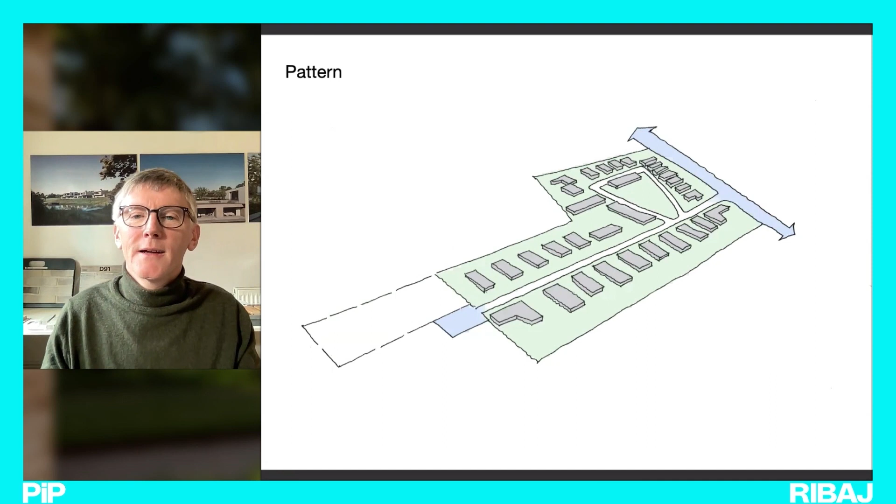To the north, we wanted to create a green heart, a green centre for this new community populating the site. So we very simply arrived at this diagram: a lane with plots to either side and a green triangle surrounded by dwellings that overlook it. This is after a number of iterations, but actually very quickly we arrived at this configuration and this mix of housing.

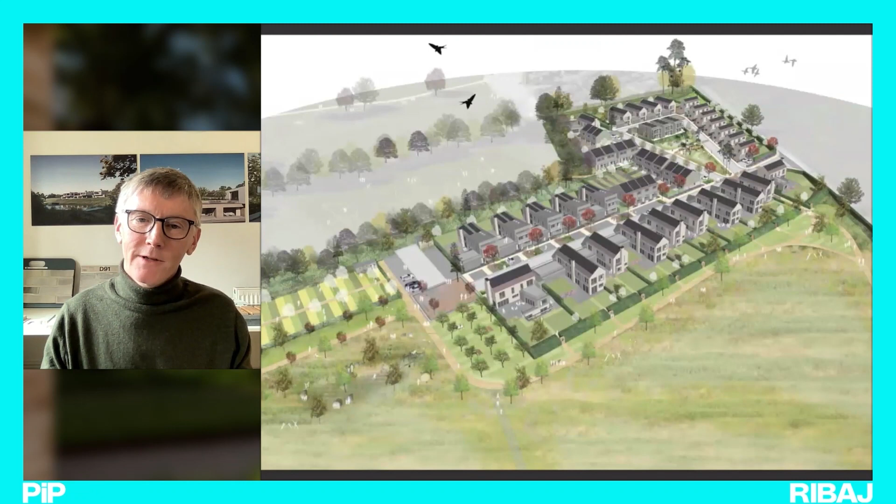You'll start to see on this image the orientation of the houses was key, and the reason they're orientated away from, not aligned with the street, but perpendicular to the street, was this idea of a rural edge that is perforate, that allows gaps and views through.

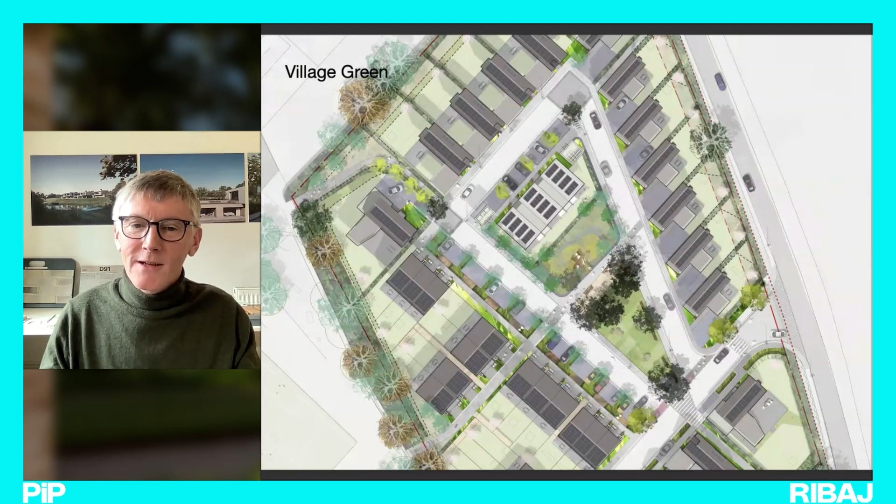So just going back to the green heart of the development: it's a hard-working space overlooked by a lot of the dwellings. It's a place for play, for meeting. It's providing a number of different types of habitat. It's also functioning as part of the SUDS strategy, the drainage strategy for the site.

And if that green triangle is the heart of the scheme, then perhaps the meadow beyond is the lungs of the scheme, and a network of paths meander around the meadow, providing a really great breathing space, both for the residents of the new scheme and also for the wider community.

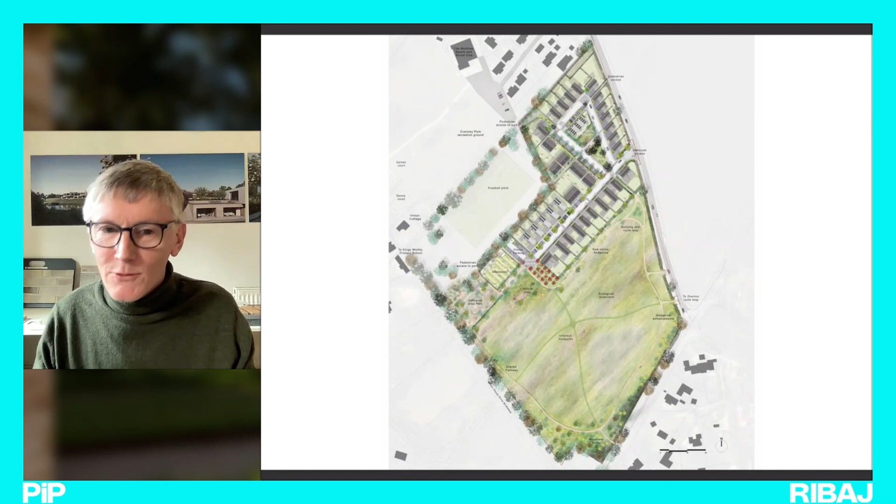As I say, this space was gifted to the village in perpetuity, along with facilities including allotments, natural play areas, and a bike park. Some of those are yet to be delivered, and they fall in the council's remit.

So we looked at 4 village house typologies to populate the development. One being the big house, maybe the rectory or the doctor's house. You get a number of these in most villages, and we located those in 3 key points at key thresholds around the site.

You also get a lot of short rows of cottages, workers' cottages, and those sit round the green. Most of these are part of the affordable provision on the site, and they're all 2- and 3-bedroom houses. Some of them are market houses as well.

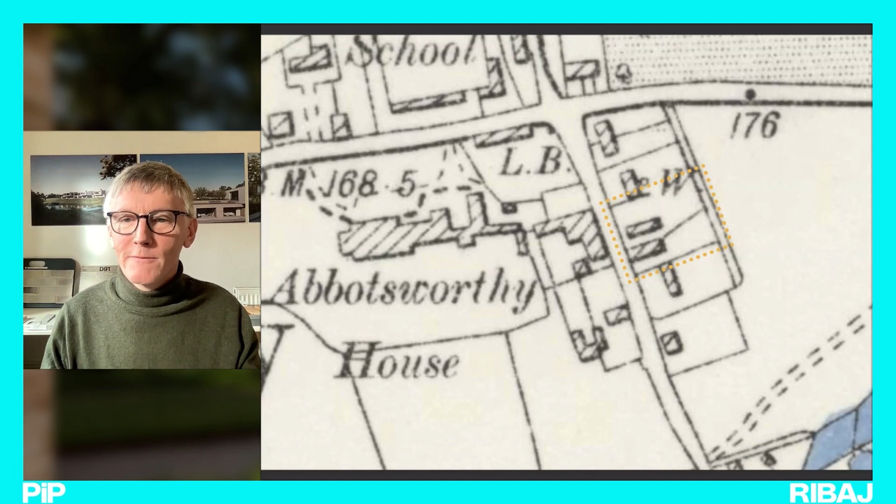And you can see that grain appearing on this diagram. Actually, I should have said at the outset that BD Landscape were the landscape architects on this, and really this is a project about BD Landscape and John Pardey Architects working very closely together. Rob Bezic and I have worked on a number of projects over the years, but this is a project that is all about landscape and buildings working together, so they're a really key part of the project.

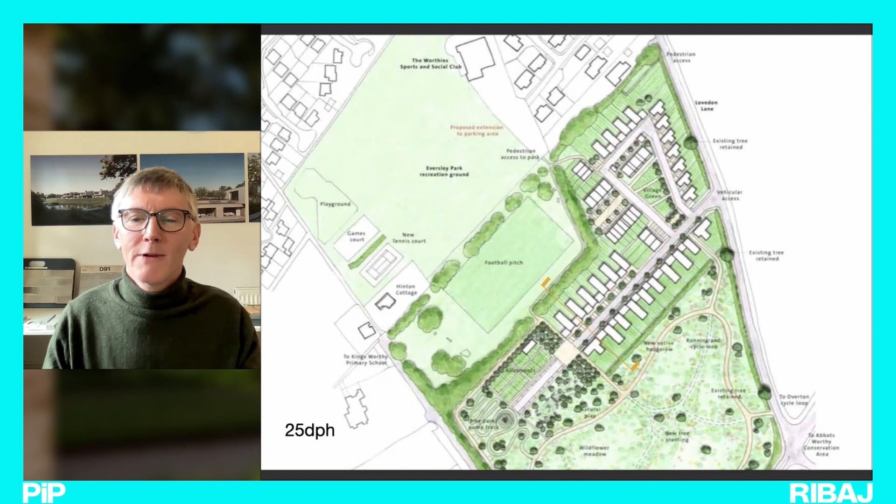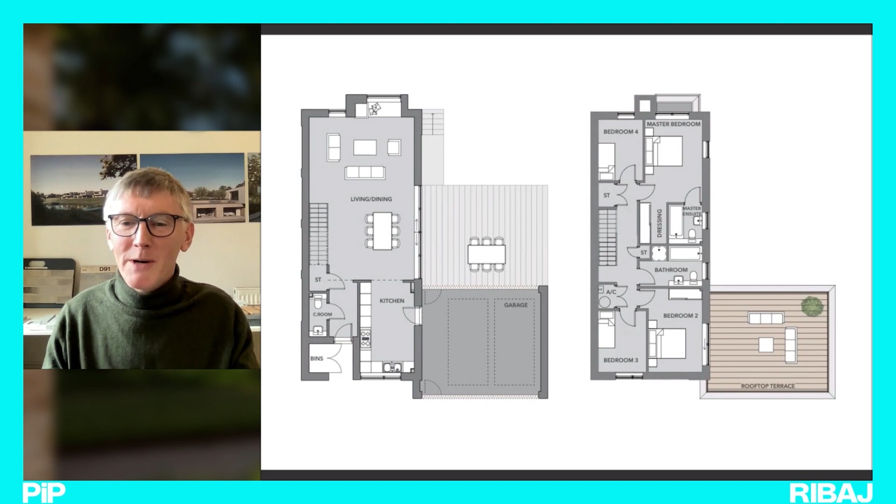In terms of materials, we started with the brief that the buildings should be predominantly brick, and I think we all thought they would be a red brick, that is the Hampshire brick colour. But as we explored that, it became evident that on such a visually prominent site, red was quite jarring, particularly early in the project's life, until the landscape had a chance to embrace it.

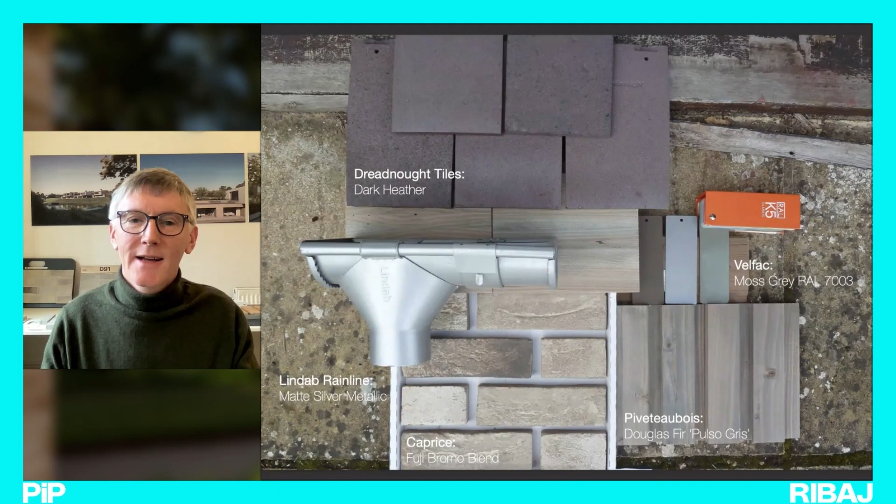So that's the palette of materials. One thing that almost everyone says when they visit the site, and other residents within Kingsworthy, is how successful the palette of materials have been. So we're really pleased that that has worked well.

I mentioned the meadow earlier. Previously it was arable land that needed to have the topsoil stripped away so that it was suitable for chalkland wildflower, and that is obviously a fantastic asset for Kingsworthy and for the residents of Lovedon Lane.

But one of the things I'm most pleased with is that we were able to introduce a lot of new hedging. We have dormice on the site, and we were really keen to provide hedges that provided a soft edge to the development, not just on boundaries, the public boundaries, but also between plots, getting away from that ubiquitous close-boarded fence that most developers insist on using. But HAB were really keen to embrace this idea, and it really is a strong part of the character of the development - the sense that you've got these buildings sat within a very verdant landscape.

Finally, another feature that Rob Bezic and BD Landscape often introduce to schemes is seating. In this case, just simple oak benches provided by a local timber supplier, raised off the ground by a couple of inches. But they're a really important part of helping to support and nurture the possibility of this new community - places where people can come out with a cup of tea when the sun's beating down on their front elevation, spaces within the public realm. And basically every doorstep has one of these oak benches, so it's a really key part of the development.

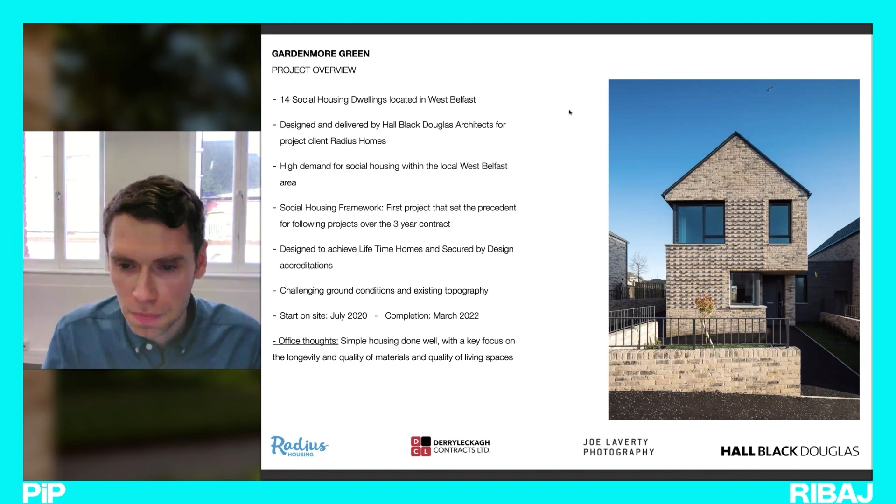We also experienced very challenging ground conditions, and working with the existing topography was quite fun. The project started in July 2020 and completed in March 2022. Generally as an office, our view on the scheme is that it's simple housing done well, with a key focus on the longevity and quality of materials and quality of living spaces.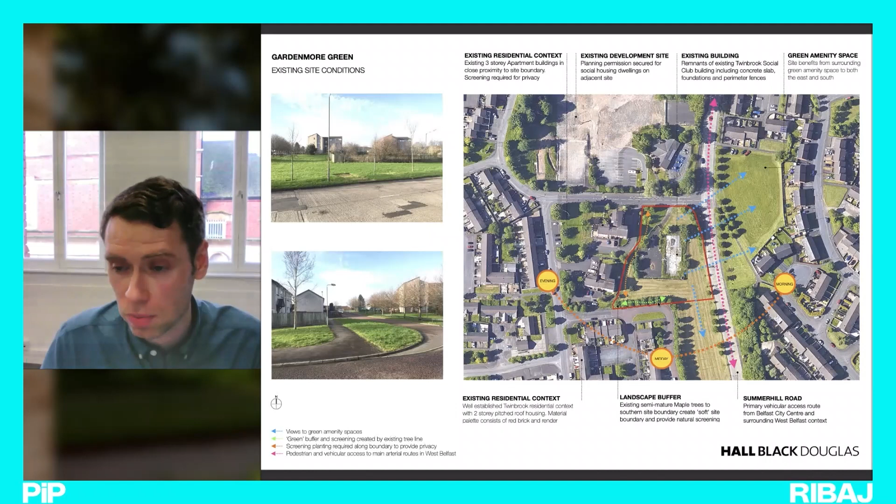To the rear of the site we had a copse of mature trees, which we were keen to celebrate within the new development. This is the overall site arrangement, which was quite simple and efficient, but we had a keen interest in creating an active streetscape and also providing as much amenity space as possible for residents, and looking to provide soft landscape boundaries to the edges to soften the transition between the surrounding context and the development.

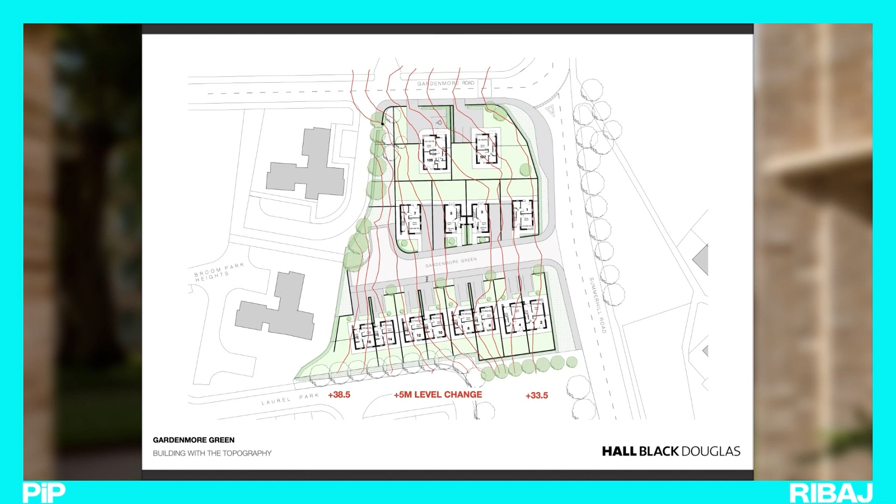As I said previously, we had lots of fun working with the existing topography. We had a 5-meter level change from the western site boundary to the east, and it was a real challenge trying to get the levels to work to provide unit access from the roadway up into the dwellings. But that challenge also created a great opportunity for us as architects to try and provide creative solutions, and also allowed us to create a very interesting stepped streetscape.

This is the southern bank of housing that we developed, also thinking of interesting ways to create retaining structures, but also soften the boundary between properties. We looked at creating raised planters with box hedging in between, and also pockets of landscape just in front of the retaining walls, again just trying to soften the impact of that whilst dealing with the levels.

On the opposite side of the street, we tried to separate the dwellings out slightly. So we created semi-detached and detached units, which gave us the opportunity to play with the roof forms. We created almost a little row of gables, again trying to create an interesting streetscape experience.

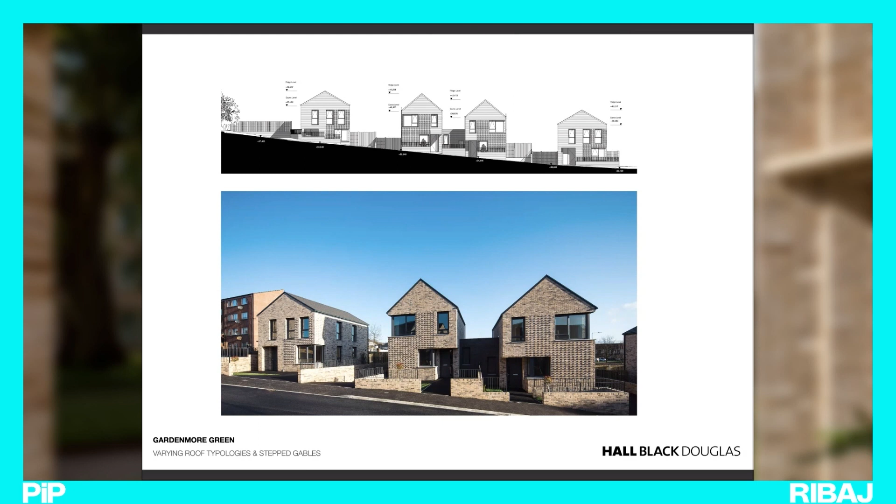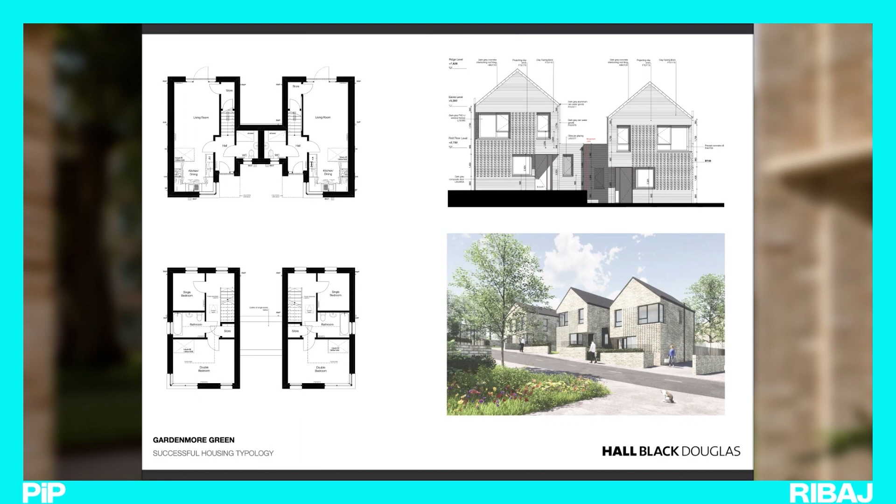So this is the housing typology as built. We think it was quite successful.

In terms of the material palette within the scheme, the main material we used was buff brick. We saw that as a contemporary marriage of the red brick and buff render within the surrounding context, breaking up the massing through brick detail panels.

Arriving home in the evening was an experience we really wanted to celebrate within the development. So we looked to provide recessed canopies, a moment of shelter for residents as they fumble with their keys in the evenings, protecting them from the unpredictable Northern Irish weather. We also integrated brick feature panels, which give a sense of tactility as you enter each home.

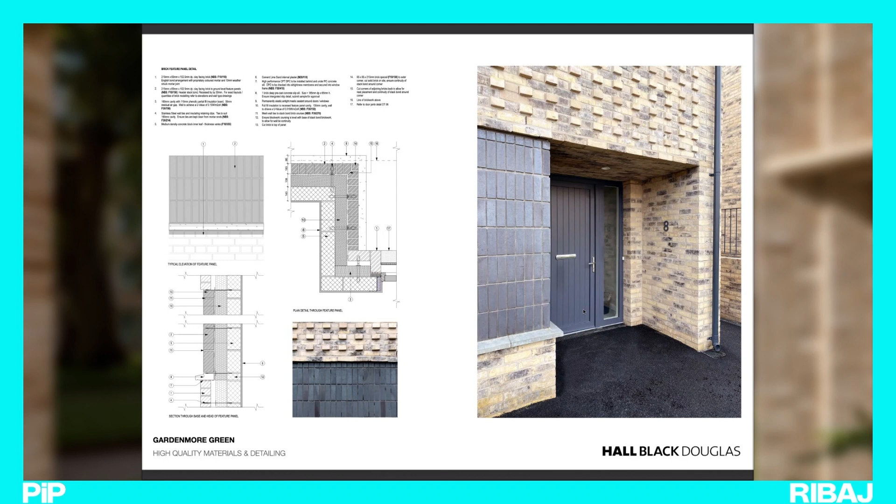Another detail we explored throughout the scheme was very simple, cost effective, but created a striking streetscape experience: projecting header courses. So we used that throughout.

Again, a key focus on internal living spaces, trying to provide as much natural light as possible and views to gardens and the streetscape. Every dwelling was designed to achieve lifetime home standards, adapting to the future needs and mobility of residents when needed.

Again, trying to introduce areas of natural landscaping, little pockets of delight as you walk through the street and also live in your home on a daily basis.

Just some of the success that the project has had within the last year: we were delighted to pick up the Small Housing Development Award at the Brick Awards 2022. And finally, thank you for listening.

Thank you very much indeed, Chris. Could you just spell out for me, are all of these projects social housing?

Yeah, so each dwelling is social housing. So what kind of budgets were you working to? I think the overall contract value was in the region of 1.8 million for 14 dwellings. Yeah, 1.8 million.

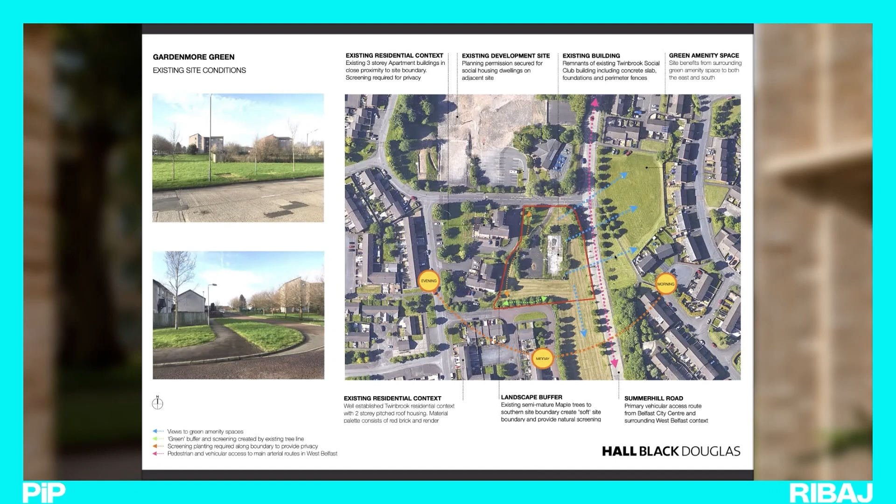The open space makes a massive difference. Given that you were trying to detail them to this extent, did you get any pushback from Radius as the developer, where they were like, we think you're overspending on details? Was there a lot of discussion about how you managed that as a design process?

I think what really helped was that this was the first project within the framework, so we sat down and explained the detailing and potential cost implications. But we were really keen to take the client on a journey to try and push the standard of social housing in Northern Ireland.

For Radius to set that standard and for us to help them achieve it. Did it feel like, since it was their first project, that they had to set themselves a standard so they were perceived as delivering higher quality homes? Absolutely, and within Northern Ireland Radius would have a reputation for pushing design quality and design aspirations, so we were delighted to push that even further on this one.

Someone here, Phil Chaddick, says £128,000 per unit gross seems good value for 3 beds with such design detail. Someone's been doing your maths for you. He's a better quantity surveyor than I am. Jamie here says, well done Chris, amazing to achieve that level of quality on a restricted budget. Thank you for upping the standards of housing in West Belfast.